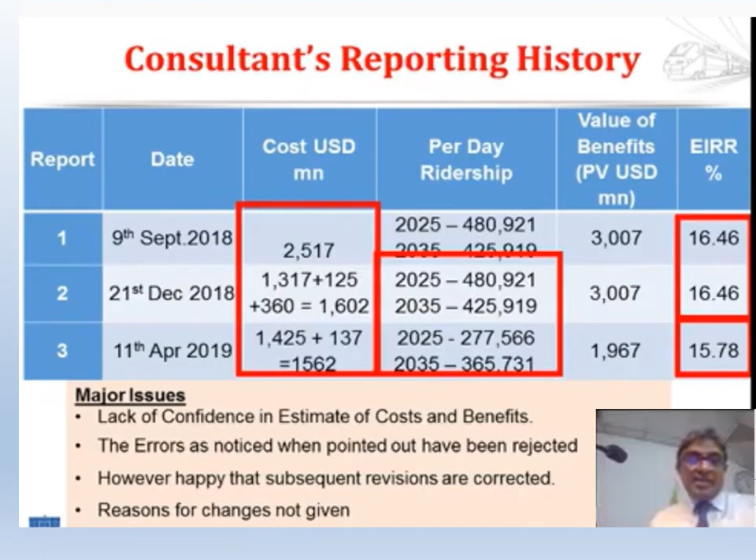The slides extracted from the PowerPoint presented at the seminar summarize the concerns by the IESL. First, they tried to show that there were 3 feasibility reports which kept changing each time a question is asked. The speaker's intention was to show misconduct by the consultants.

However, most of you who have been part of any projects or any study would know that the final report doesn't just come out at once. I have explained before the reasons for the 3 versions of the report and how it unfolded. These draft versions of the reports are usually produced in well-spaced time intervals, giving enough time for project units and stakeholders to give their comments and to monitor the progress of the consultants.

First of all, there's only one official version of the feasibility report approved by the ADB, PMU and the Ministry, and that is the report submitted on the 11th of April 2019. Any of the other versions of the draft reports were only available to steering committee members, and reasons for any changes between the internal documents have been provided to the steering committee members.

It is unfortunate we are not speaking about the final report findings, but on the reasons for the numbers being changed in an internal document, thereby making people confused. This is the very reason internal documents are not shared with the public.

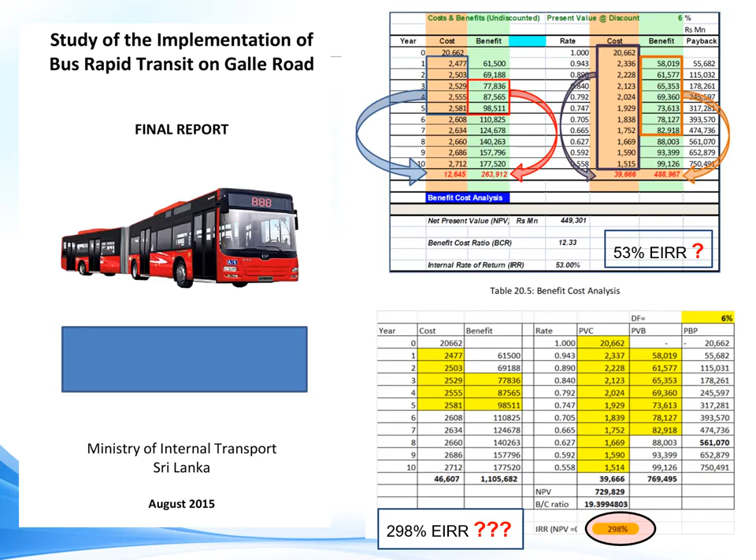It was disclosed that the estimated cost was 2.5 billion USD. As explained before, when ADB and PMU raised the question on cost being too high, the team leader explained that the cost was estimated based on international rates and he expects it to come down by 30 to 40% with detailed designs completed, and will be adjusted in the final report.

He said it on the 9th of September 2018, on the day the first draft report was submitted, not suddenly after a month or because of the IESL question as misinterpreted by the presenter. The cost was updated in the December 2018 report first, and finally in the final report on April 11, 2019. The estimated final cost was 1.4 billion US dollars, with a construction cost of 1.2 billion US dollars.

The reasons for the reduction explained by the team leader were twofold. A, it was due to refining of the initial cost done based on international rates and using new local rates in detailed cost estimation, with optimization of structures like bridges, stations and track works, and due to change in rolling stock cost. And B, due to the previous cost being estimated in LKR and converted based on an exchange rate of 150 instead of 179.

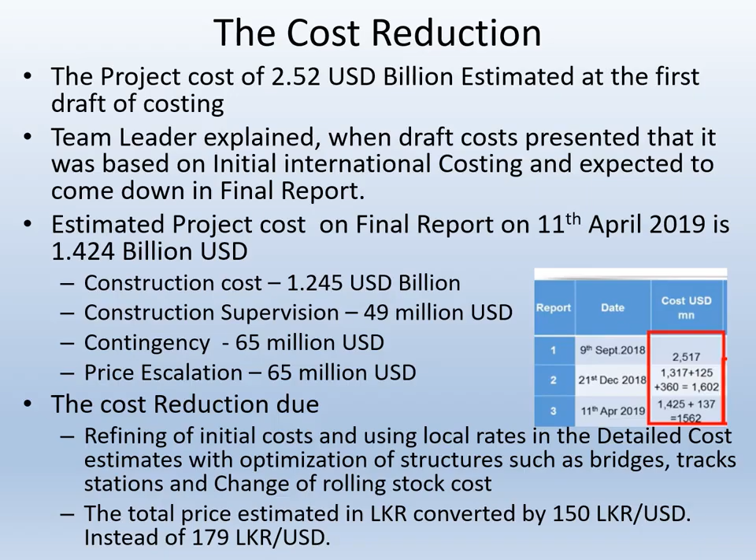So let's move on to the questions on demand analysis. The presenter tries to show that the demand numbers have changed with no reasons given, and tries to add to the story as if the numbers are just made up. The basis for this accusation is that the demand numbers remain high in the so-called reports 1 and 2, and suddenly come down in report 3.

When we do the demand modeling, we don't do one run. It goes through a thorough scientific process, and this is a technique that not many in Sri Lanka understand. So I will explain it in detail a bit later.

Although we know what would happen now, what we don't know for sure is the future scenario. There can be many ifs and buts, and the demand numbers can change based on many combinations of assumptions you make. One such assumption is how you consider population growth for the future. A high growth will have more demand, and a medium growth in population will have lower demand. Later on, you would see that this change in demand numbers was based on such assumptions on population growth.

However, all these model scenarios are well documented in the feasibility report, and therefore there are only two reasons the presenter says what he says: either he has not read the report, or he has not understood what is written in the report, or he does not understand modeling in general.

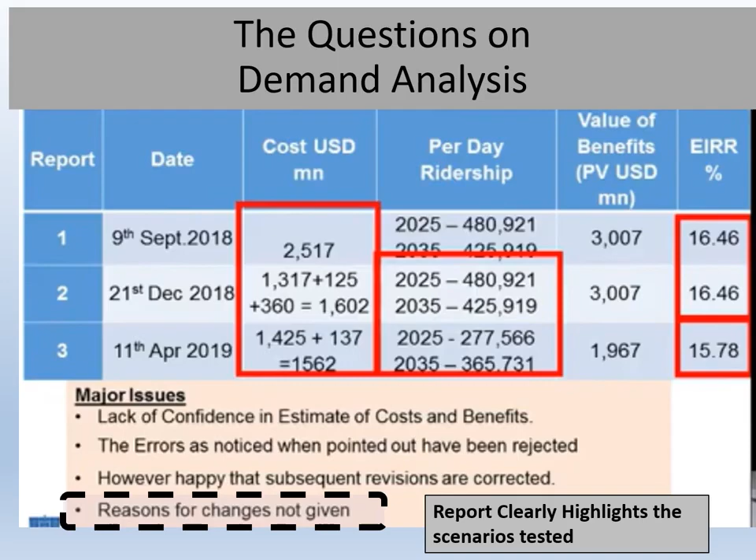The demand modeling designed for the rail demand depends on three key assumptions. The first is the operational assumption that includes the fare, the frequency, the speed, access time to train, wait time, the facilities, etc., which can be considered fixed normally. The second assumption is how you consider the socio-economic assumption, where you consider how your population and employment is expected to grow - that is, whether you consider a low, medium or high growth scenario.

The final and third assumption is what other projects will have an impact on the demand. The impact can be sometimes positive and sometimes negative. While the operational assumptions can be considered fixed, multiple combinations of socio-economic growth and other projects will create the alternatives that you consider for your modeling.

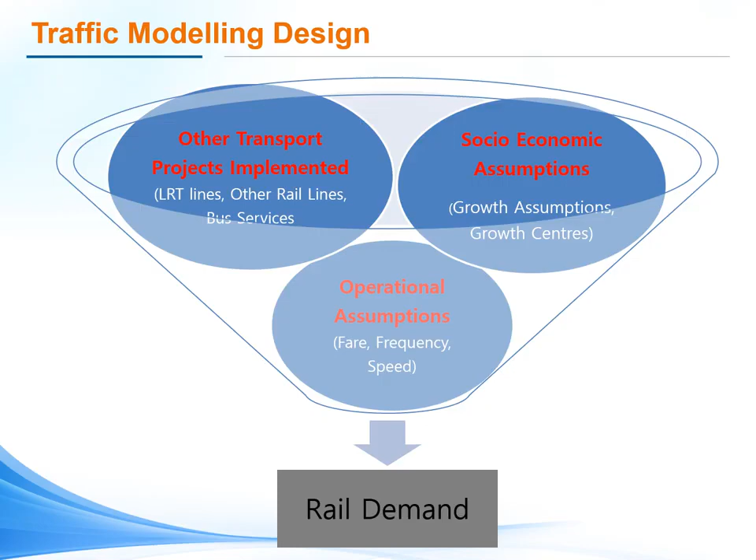There were two major development plans available during the study. The first was the Megapolis plan, which considered a high population growth scenario, with population growing from 5.8 million in 2013 to 9.1 million by 2035.

The second major development plan was the Comprehensive plan, which assumed a medium growth scenario, from 5.8 million in 2013 to 7.8 million by 2035. The study used both assumptions, considering Megapolis as the high growth scenario and the Comprehensive plan as the medium growth scenario.

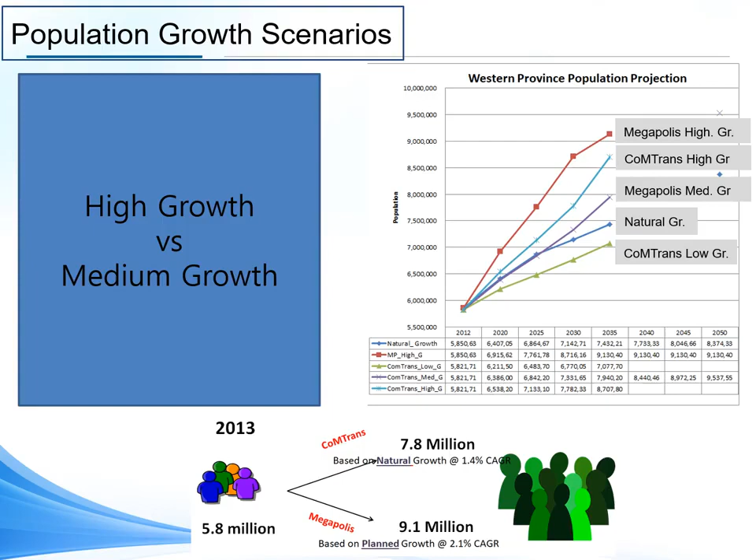These were the socioeconomic assumptions used in the study. Three alternate modeling scenarios were considered. Scenario 1 was a high population growth scenario but with moderate planned other public transport.

This was considered the high growth Megapolis development scenario. Scenario 2 was still high population growth but with virtually no other public transport development, known as the high growth, less public transport development scenario.

The final scenario considered was a medium population growth scenario with the same public transport development as scenario 1. Although only 3 scenarios were reported in the final report, over 50 modeling scenarios were considered in the study to look at the impacts.

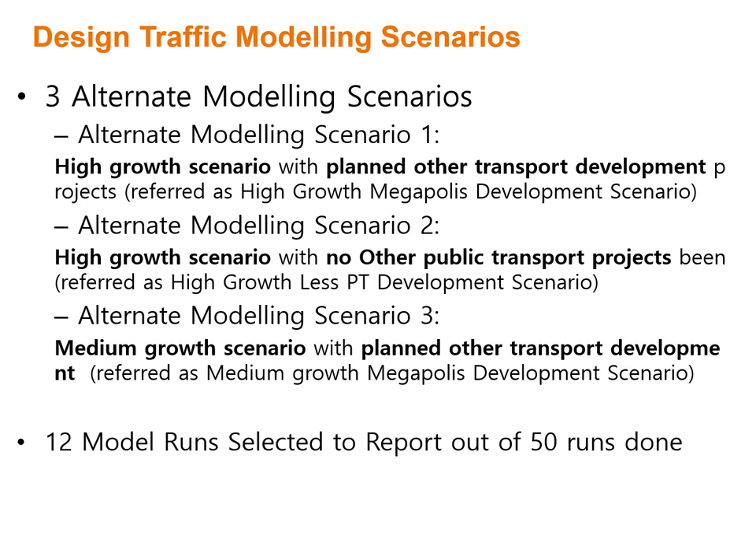The above modeling scenarios were tested using a modeling process I will describe next. What we really want to understand is the number of people or passengers that will use a rail network or a road network. The process used was called a 4-step method.

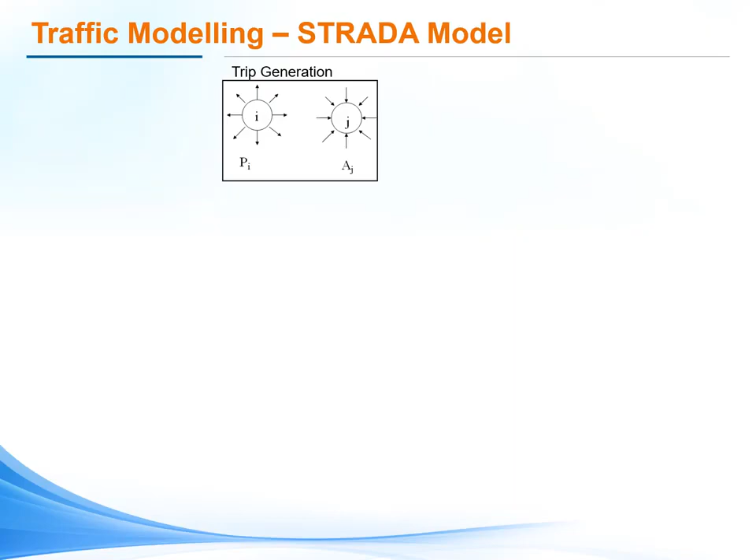The first step is called trip generation, where we determine how many people will travel to and from a particular area. What we get is called a trip table. The inputs are socio-economic information such as population, jobs, school children, etc.

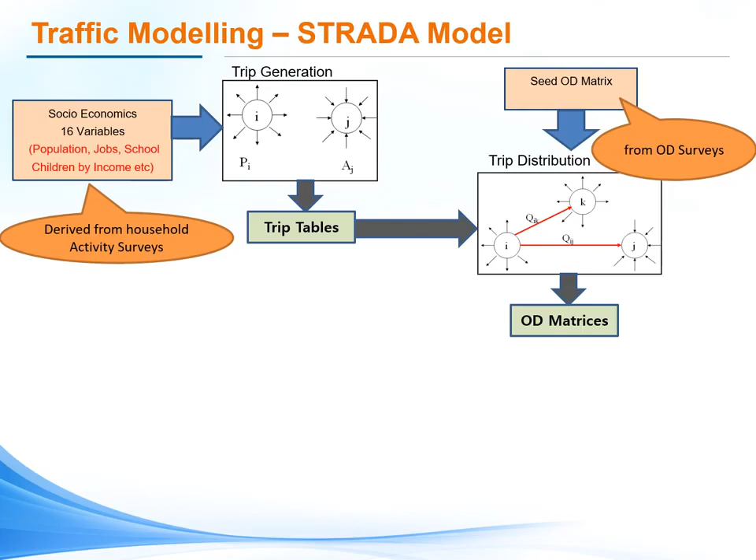The second step is called trip distribution. Here we use the trip tables from the first step and determine where people are going to and from each area. We use previously done origin-destination surveys, and the output is called an origin-destination matrix.

The third step is called mode choice. Here we calculate how many people would choose a particular travel mode to go to their destination from their origin, whether they use the car, motorcycle, bus, rail or LRT.

This is where comparative analysis is done, where fare, travel time, access time, and frequency between each mode play a role, and people choose a mode based on their perception. We use survey information on how people behave to break out one single OD into multiple ODs. This mode choice step is one of the most important steps of urban transport modeling, especially for a public transport study.

The final step is called assignment, where people choose what route they will use. For road networks, we use highway assignment, and people choose which road or route to use. For public transport, we use transit assignment, and people choose between routes in a particular mode.

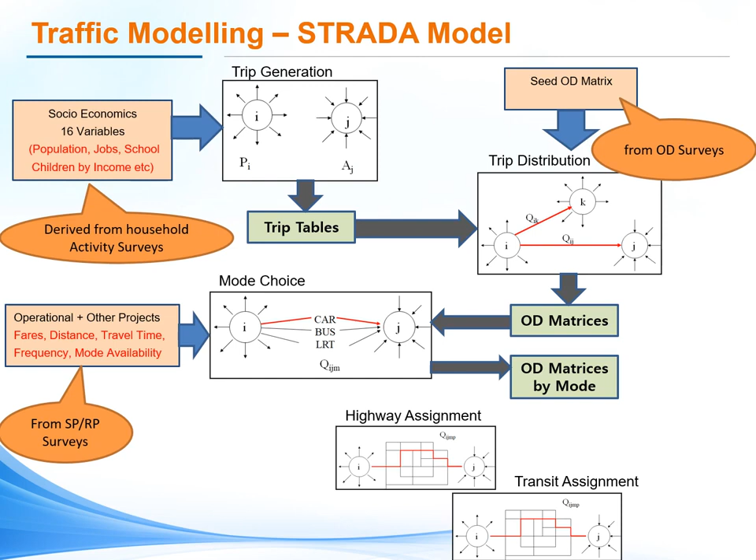For example, if it's a bus, they'll consider route A against route B. The output gives us how many private vehicles will use a road and how many passengers will use public transport. This step is circulated through mode choice in a couple of iterations.

For a known year, when we have information, we run the model and calibrate it so that what we know is produced by the model. That is what we call calibration. Then we run the scenarios for the future to understand what we don't know.

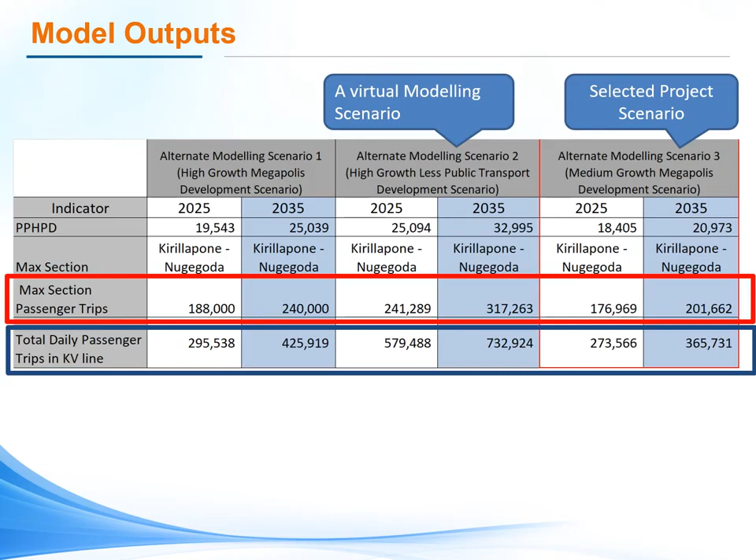The table shows the summary of passenger demand for the 3 alternatives considered, including total passenger trips at the maximum section and total passenger demand in the system. At the initial stage, we considered the high growth scenario and reported that as the project scenario, because Megapolis was the government plan and therefore had a higher expected demand.

But later, based on discussions with the ADB and the PMU, we decided it was more appropriate to use the medium growth scenario rather than the high growth scenario. That is the reason for the change in the demand numbers, and why the demand numbers have gone down.

For example, what was reported as 188,000 in 2025 at the maximum passenger section had gone down to 177,000. What was reported as 240,000 in 2035 had gone down to 202,000.

Similarly, total passengers in the whole KV line network went down. For 2035, it went from 426,000 passengers total to 366,000 passengers. This explanation has been given to the presenter and to the whole group, many times.

So why the reasons keep needing to be repeated over and over again is a big question to me.

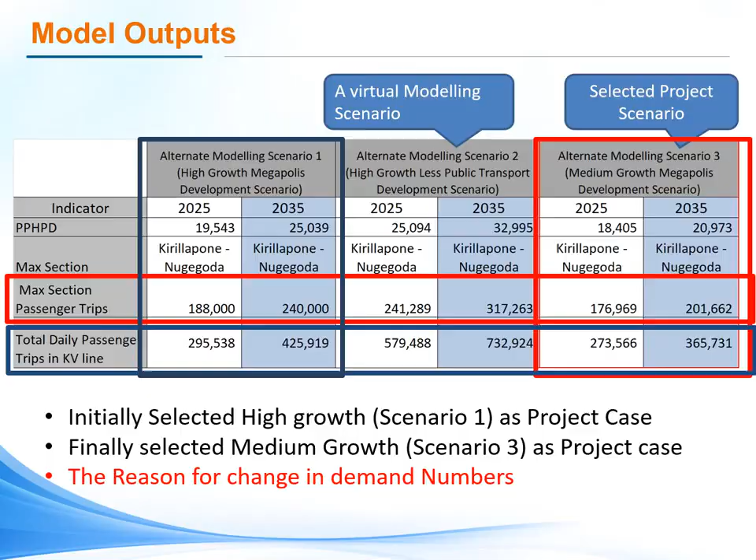There are two separate demand numbers which people sometimes get confused with. One is called the sectional volume and the other is called the total daily passenger trips. The sectional volume is the total number of passenger trips in a particular section. Usually we are interested in the section that has the maximum number of passengers, which is used for planning purposes.

In this case, in the KV line, the section with the maximum number of passengers was the Kirillapone-Nugegoda section. This number is used to calculate the passengers per hour per direction, technically called PPHPD. This determines how many passengers we need to carry during peak time, which in turn decides how many trains per hour we need to send. Therefore, this is an important number.

However, this section does not include all the passengers in the system. For example, passengers having an origin and destination between Fort and Borella, Fort and Narahenpita, Borella and Kirillapone, and Homagama and Nugegoda, etc., do not get counted in this section or the maximum section between Kirillapone and Nugegoda.

Therefore, it is important to know that the total daily passenger trips is different from the sectional volumes. The total passenger trip is the aggregation of all passenger trips between all stations, and this will count all passengers even going a short trip. Therefore, the total passenger trip number has to always be higher than the maximum sectional volume.

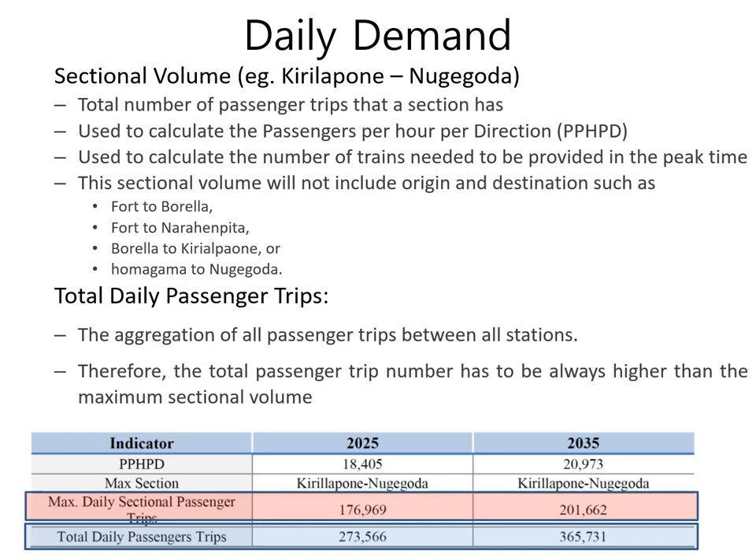For this design, the maximum section value in year 2025 was 177,000 with a PPHPD of 18,400, and for year 2035 it was 201,662 with a PPHPD of 20,973. The total passengers in the KV line system was estimated as 274,000 in year 2025 and 366,000 in year 2035. This is very common for people without modeling knowledge to get confused with this definition and mix up these numbers.

This is understandable as this is the hardest calculation to do manually, going through a 476 by 476 matrix. And if you really don't know what the model is doing, it will be very hard to show it. Knowing the people who do the work for him, and knowing that they don't get any guidance, it is understandable that they have omitted this number.

The presenter tries to mislead people that the same model is being used, going on to say that if two engineers use the same software, the same model and the same input, they should get the same results. You need to understand that the model is a process, and the process is enacted inside the software. Therefore, the model and the software are two clear components.

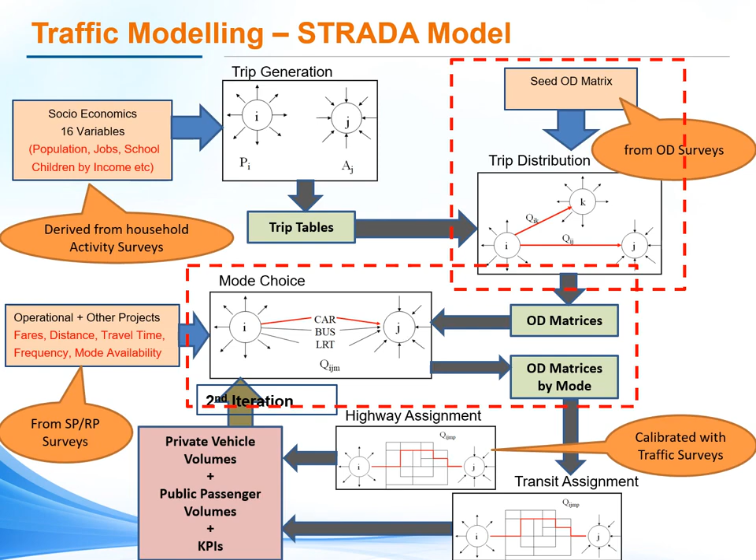You may remember I explained the 4-step model and explained that the mode choice component is the most important step in a public transport modeling work. What I will show you next is how the presenter has considered the approach, based on the documentation of his work.

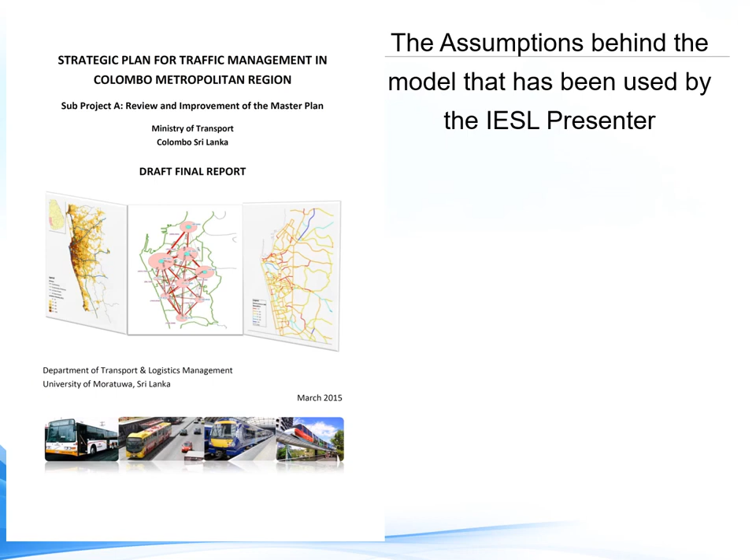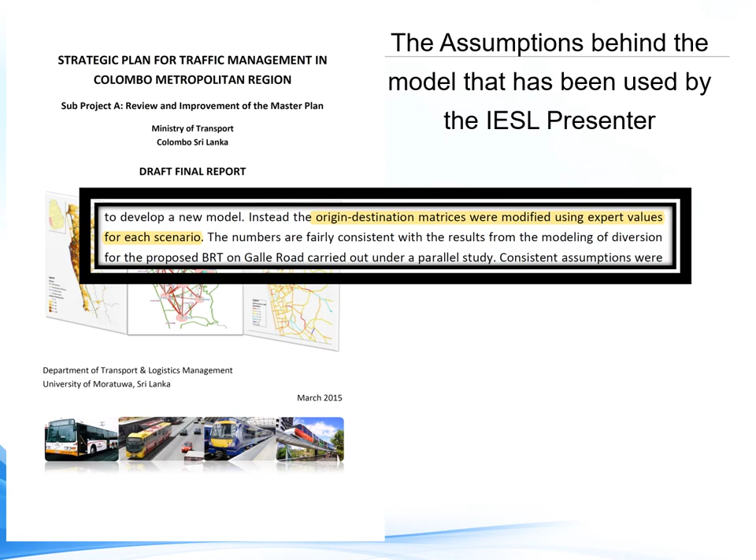You can go through this document where the assumptions in the process he uses are documented. First of all, the OD tables are modified based on expert value, and it is not based on population or employment change. This is one of the hard-coded assumptions that is being made.

Secondly, the mode choice component, which is very important in a public transport study, is omitted, citing that Cube software was not available and due to limited time of the study. Mind you, this study in question took over one year, the study done by this presenter. Also, when we did the mode choice, we didn't need this Cube software, but only needed the knowledge of mode choice modeling, and that is what we used.

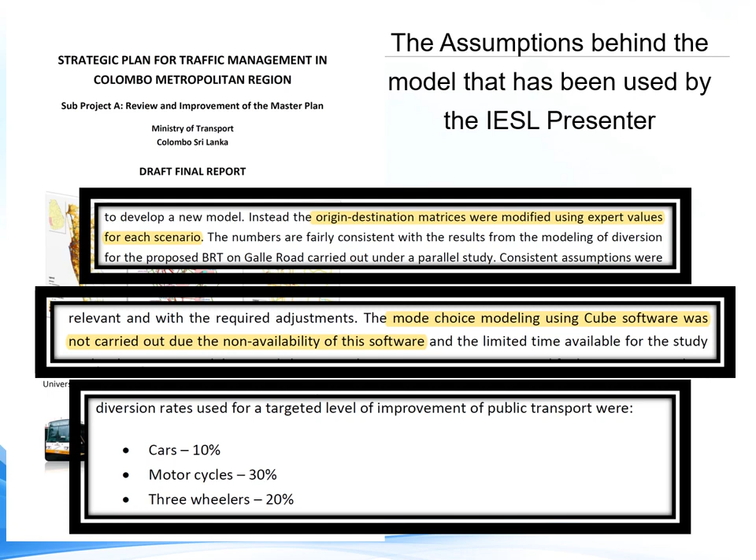Let's look at the assumptions they have used, as opposed to the excuses given earlier for not using proper methods. The assumption used is to hard-code the numbers: when developing public transport like a bus lane, BRT, or railway line, it was assumed that 10% of car users, 30% of motorcyclists, and 20% of three-wheeler passengers will switch to that public transport. This is a very hard-coded assumption that can lead to skewed answers.

In other words, if you want more demand, you can increase this share by a certain number, and if you want a lower number, you can decrease it. These are numbers that are not sensitive to any changes in fare, frequency, travel time, or other projects happening around.

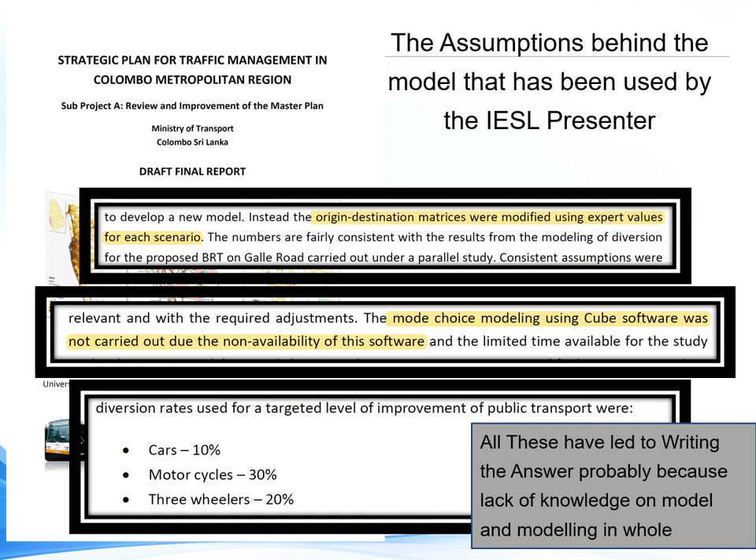So it's clear why we get an EIRR of 298% as discussed before, because these are based on hard-coded assumptions. Bottom line: even if he uses the same inputs, he will never get my results, since we use two different modeling processes. This flawed process was applied in the Transport Master Plan made by the same presenter. Recently he has been promoting this same plan again, citing COVID as an excuse. We should take note of these flaws and have it reviewed by an independent body before considering anything from it.

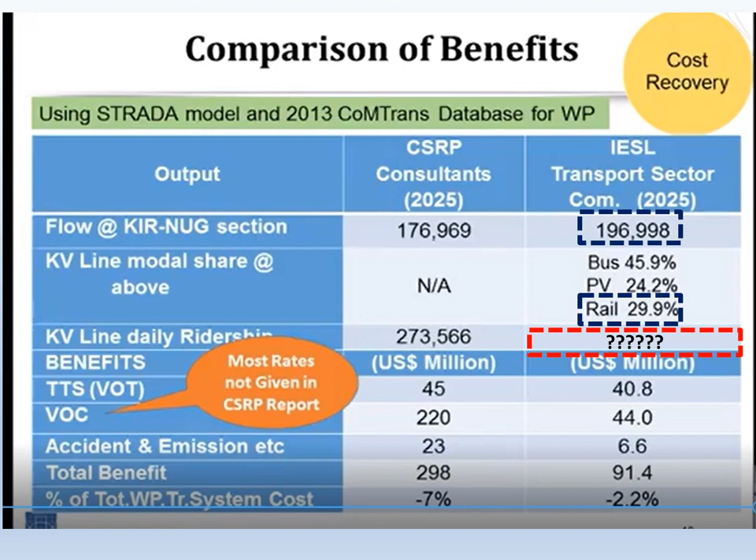Now let's check whether the numbers he presented make any sense. He states he gets 196,998 for the maximum section between Kirulapone and Nugegoda, which is a 30% share of rail from the total corridor, taken from his own slides. If 196,998 is 30% of the total corridor volume, then the total corridor passengers, that is 100%, would be 657,000. I hope you agree with me.

He estimates the total number of passengers passing Kirulapone by car, bus, train, and all other modes will be 657,000 by year 2025, not 2035. The number we surveyed in 2012 was 175,000. So what he's saying implies an 11% growth per annum for all trips.

What we estimated for 2035 in the medium growth scenario was 354,000, and even for high growth it was 419,600. But the same presenter made a big fuss in previous meetings, saying our demand estimations are too high and overestimated. Yet here he estimates a total corridor demand of 657,000 for 2025, which is even higher than our high growth scenario for 2035.

There's something terribly wrong with his estimations. We wanted to check whether we had made a mistake, so we officially wrote to the university requesting his calculations and model, since the model he used was provided by the Ministry of Transport for a previous university project. Unfortunately, he has avoided providing the information, replying that this work was done privately for IESL and not as part of the university. That is again a questionable claim.

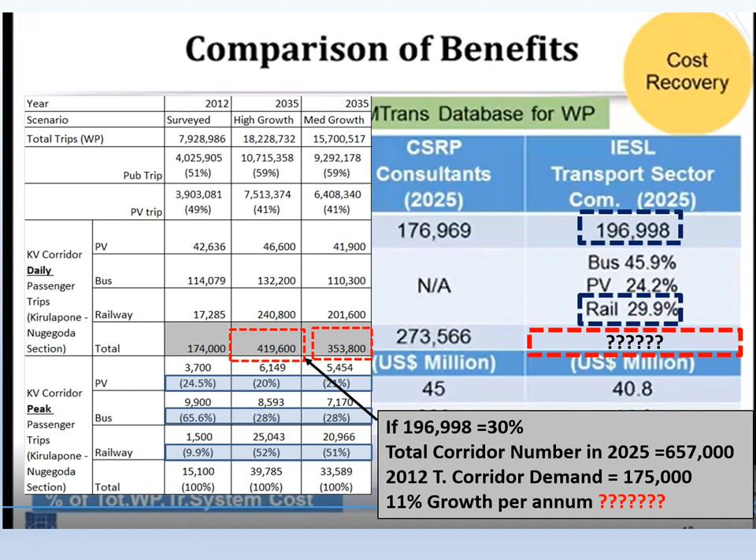Even though the current KV line is carrying 30,000 passengers right now, keep in mind you can't compare the projected numbers against what it's carrying currently, because it's a single track with only 8 trains running in the morning peak and 8 in the evening peak, with only 3 trains in the peak time. This is a substandard system with a substandard signal system, 40 years old, poor quality service and infrastructure. You're comparing this 30,000 demand against a system where we'd expect to run almost 12 trains per hour, and by giving the necessary boost, the model shows that passengers will come in big numbers.

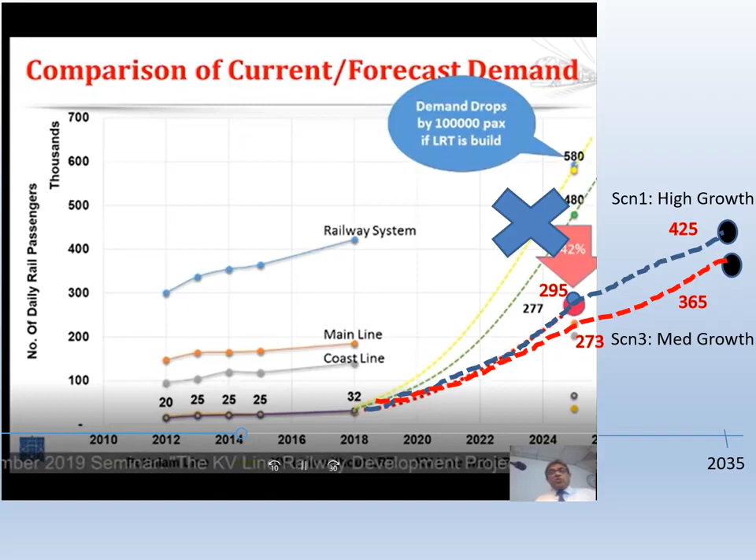Let's move on to the vertical alignment. The argument put forward by the Transport Committee of IESL was that the track should not be elevated from Maradana to Malapalla as proposed by the consultants. Instead, they proposed elevation of 4 sections, basically elevation over 6 roads, to a length of 6 kilometers.

The seminar was when we first saw this proposal. But no details, no calculations, nor the basis for the proposed alternative design is known to this very day. I'm sure if you ask even today, you will not get any answer. However, our team of engineers, mainly local experts with railway engineering knowledge, along with the consultants' team, went on and reviewed the sections they proposed to elevate.

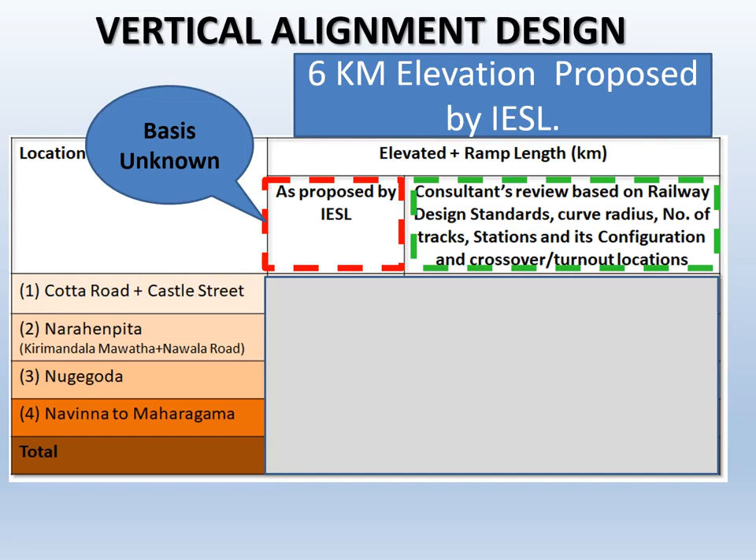The consultant looked in detail at design standards, curve radius, the track, station location, and other factors such as crossovers. The main question when reviewing was to check whether their proposal was technically correct or practical. We expected, coming from a group of chartered engineers, some being railway engineers themselves, that they would have a sound basis for their claims.

To estimate a distance of elevation, you need to know at least 2 parameters: the clear height of the elevated section and the ramp gradient. These are essential. So we asked this whole group at one of our one-to-one meetings at the Finance Ministry for their assumptions. Unfortunately, they had no idea and no answer, not even that it was needed. Their reply was that they had not looked into them in this detail. So later you'll find they had not even considered a clear height, and their ramp gradient was a whopping 3%. We all know you need to provide at least 10 meters clear height at elevation sections, and the gradient cannot be more than 1 to 1.5% for railways.

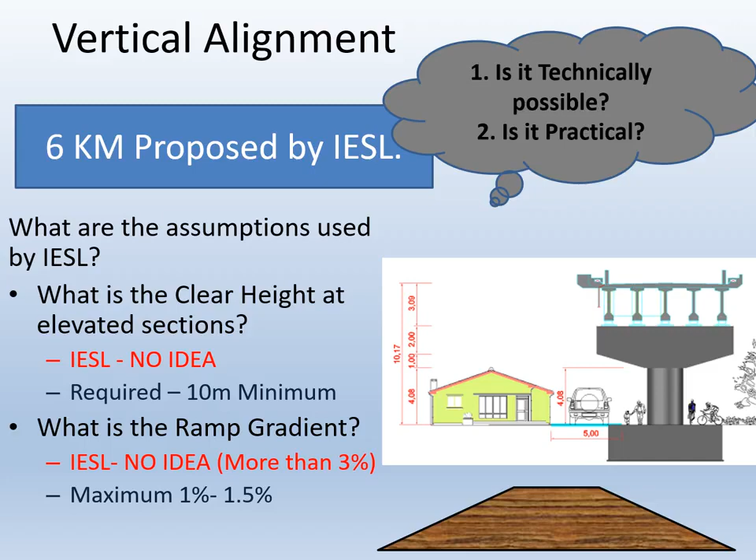Sad, isn't it? I will walk you through why their proposal of a 6 kilometer length is practically impossible and technically incorrect. Let's start with the Cotta Road section, where they propose a 1.15 kilometer elevated section. This elevated section comprises 340 meters of total elevation, a 400 meter up ramp, and a 340 meter down ramp.

First, we found that they had considered elevating only based on clearing the roads. But since the location is close to a station, the elevated section had to be 767 meters instead, to include crossovers and curvatures. Second, we found the ramp length was based on a 3% gradient, which a railway cannot run on. Therefore, the ramp lengths they considered were too short.

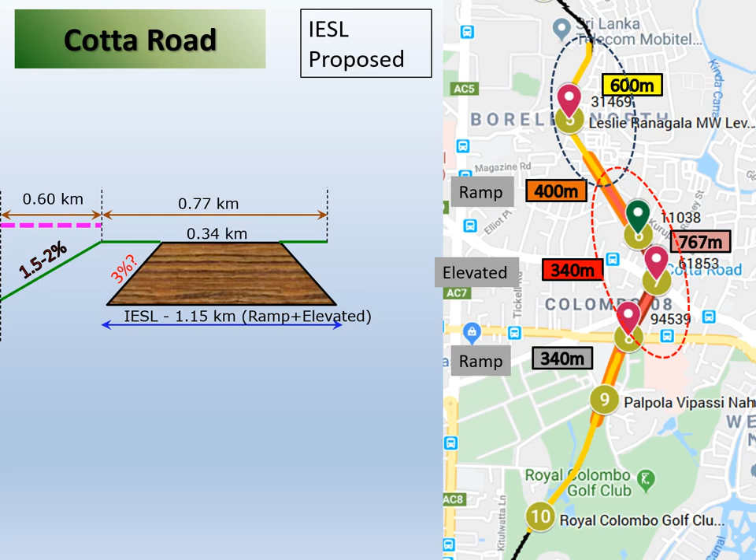The up ramp should be 600 meters instead of 400 meters, and the down ramp should be 780 meters instead of the 340 meters considered. So the assumed 1.15 kilometer elevated length is technically not possible. Instead, a 2.15 kilometer length is needed. And this also created a further problem, because the down ramp came right in the middle of the golf course.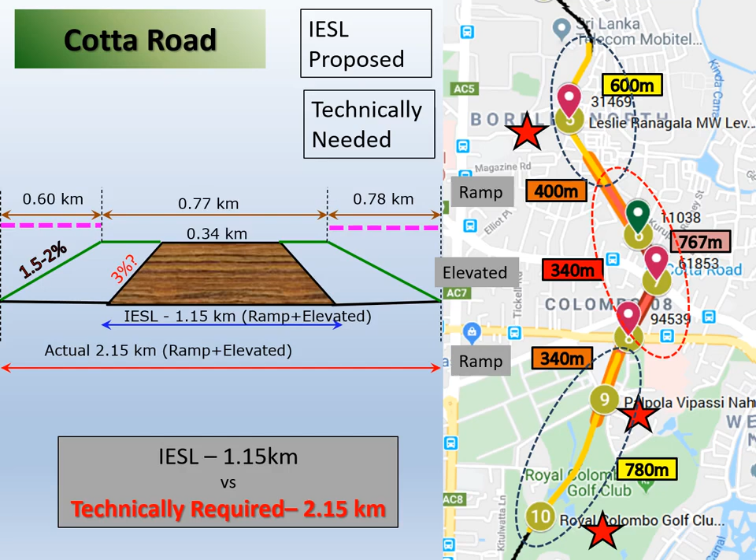Also, two other locations, Leslie Ranagala Mawatha and Palpola Vipassi Mawatha, have to be closed in this case because the ramp section is halfway across these roads, so vehicles cannot pass through at the ramp sections.

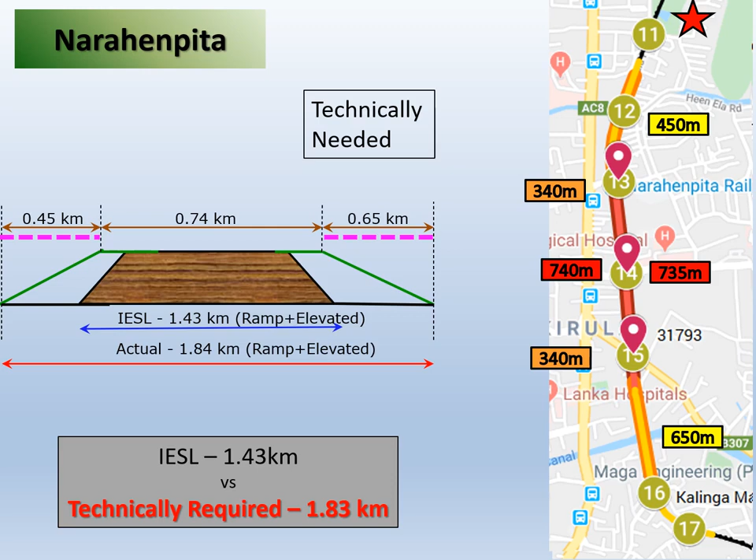At Narahenpita, it's a similar story. They had considered the ramp gradient high, and instead of 1.43 kilometers they assumed, you required 1.83 kilometers to be technically sound. At Nugegoda also, it's a very similar story.

What they had proposed was to use 340 meters as total elevated section, with a 400 meter and a 320 meter ramp length. Once again, there's a station at this section, and being at a curve, the length of elevated section required is 780 meters instead. It also required longer ramp length because they considered only a 3% gradient, and because of the geometry and being at a curved section. So instead of 0.98 kilometers, technically you require 2.69 kilometers.

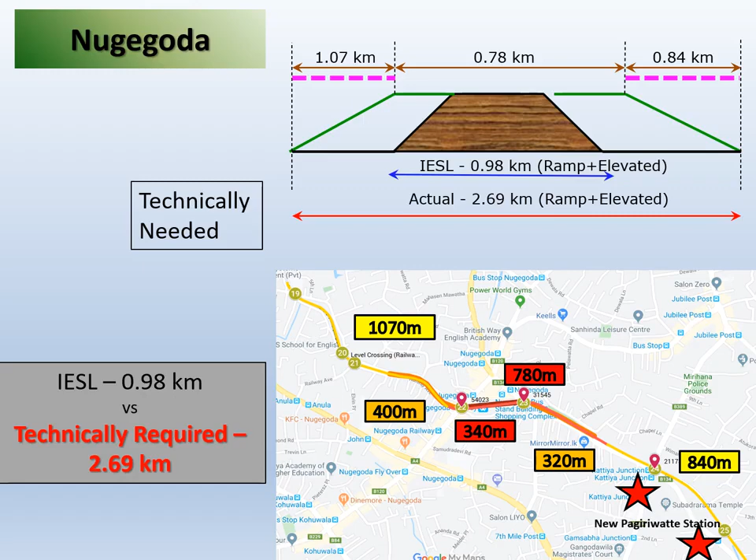It also brought further problems with the down ramp coming right in the middle of Mirihana road, which is one of the widely used roads at the moment.

And the section between Nawinna and Maharagama, they got the elevated length correctly here at 1.6 kilometers, but the ramp section is too short. So instead of the 2.44 kilometers they proposed, technically you require 4.4 kilometers.

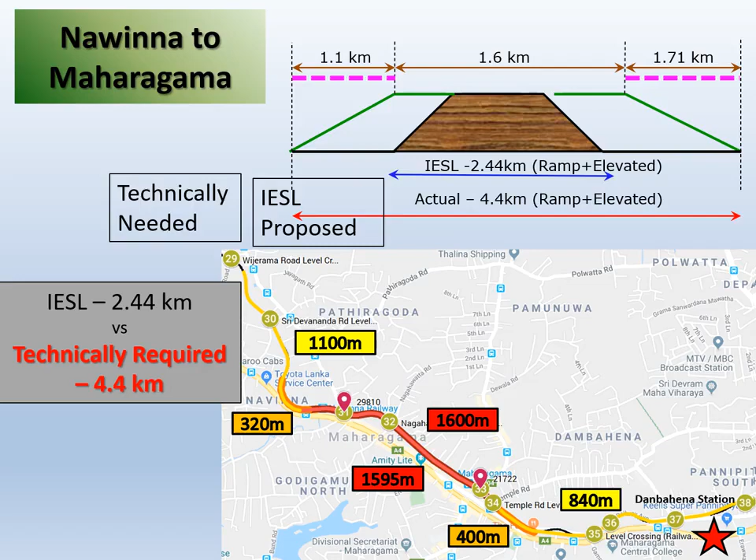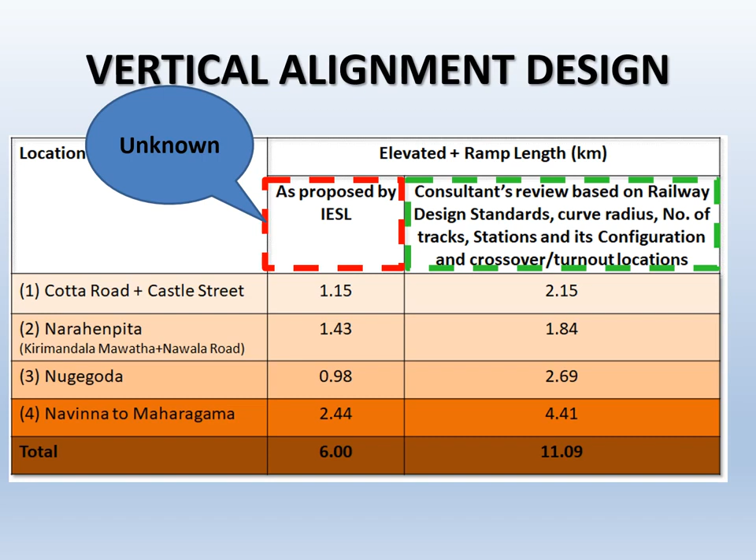So when you summarize what they have told us and our review, we find instead of 6 kilometers proposed to elevate these 4 sections, you will technically require 11 kilometers of elevation. So we can conclude their proposed 6 kilometer track elevation is practically and technically incorrect.

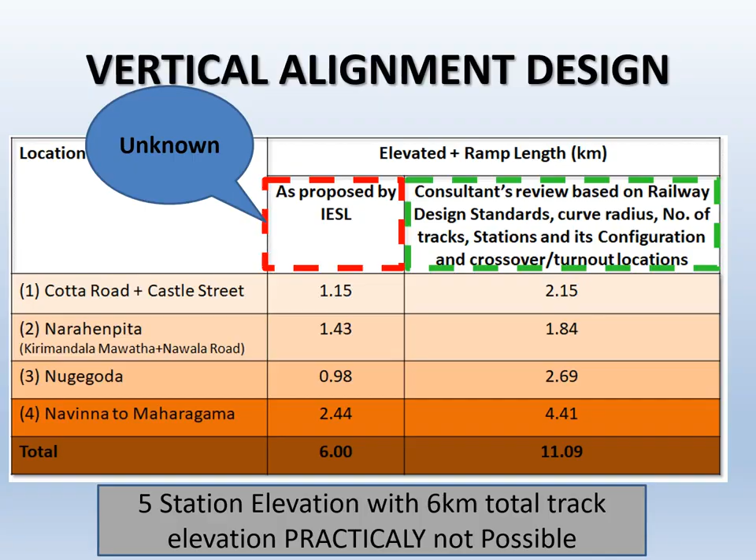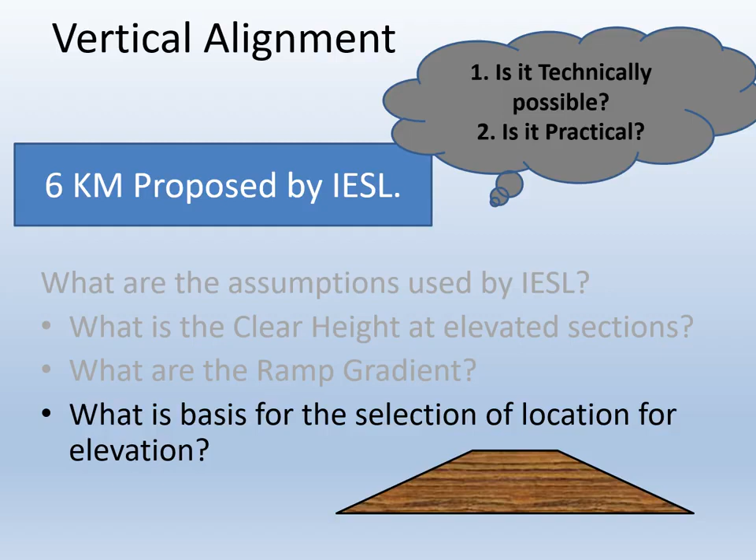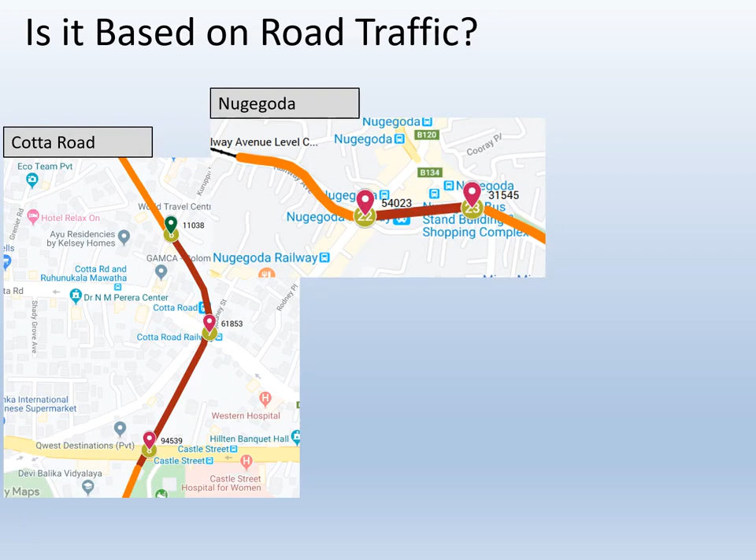We then tried to understand what is the basis for them to propose these 4 sections and why they selected these roads to be grade separated. The question we had was whether the selection was based on road traffic, so we looked at the 4 sections separately and reviewed the ADT, the daily traffic, of all the roads they proposed to grade separate.

We could see that they had recommended to elevate the Ruhunukala road at the Cotta Road section, having 11,000 vehicles per day. And on the Narahenpita section, they recommended to elevate at Dabare Mawatha and Kirimandala Mawatha, having close to 23,000 and 21,000 daily traffic.

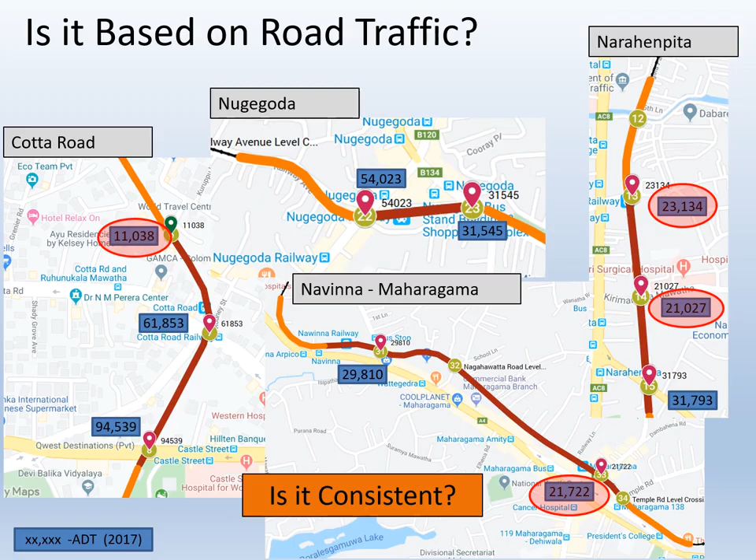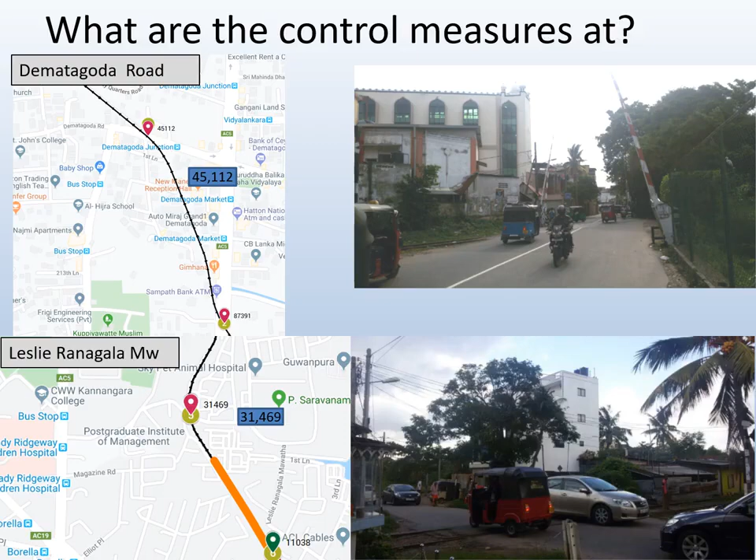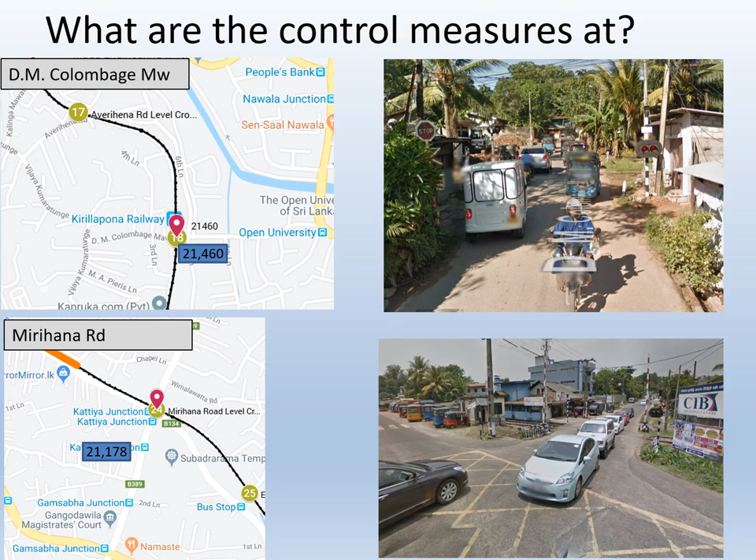But we could not find any consistency, since there were many more roads with higher daily traffic that they did not recommend to elevate. For example, Dematagoda road having more than 45,000 vehicles, Leslie Ranagala Mawatha having 31,500 vehicles, DM Colombage Mawatha having more than 21,000 vehicles, Mirihana road having 21,000 vehicles, Pannipitiya Malabe road having more than 17,500 vehicles, and Kottawa Athurugiriya road having close to 30,000 vehicles, were not suggested to be elevated.

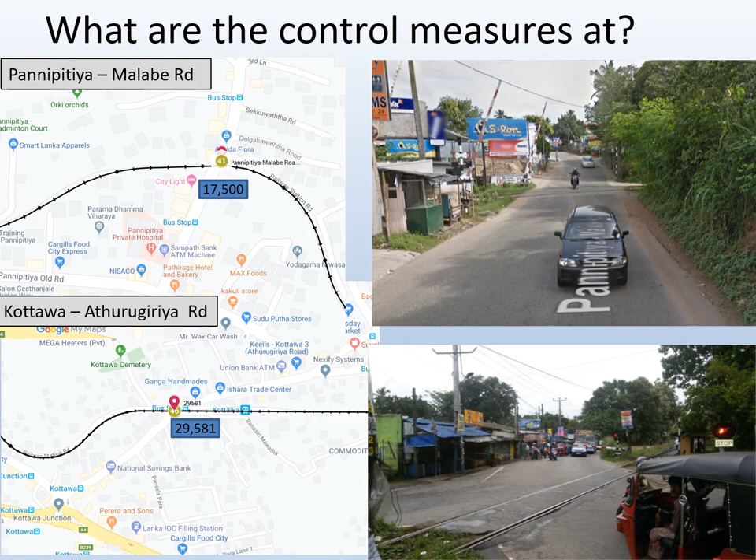So we didn't know what their proposal was. Are they suggesting to control it by gates? The more we tried to find a scientific reason, the more we found that these suggestions were all based on their opinion, not on scientific reasoning.

Now I will explain what we considered when we decided on elevation. First, we considered that there are 148 railway crossings from Maradana to Avissawella, and out of that, 75 crossings were up to Padukka, and there were 56 railway crossings up to Homagama, with 20 major crossings having more than 12,000 vehicles per day, surveyed in 2017.

We also did a scientific approach to evaluate the delays at major road crossings, which will be presented to you later on. We also considered that some roads where the railway crossings are close to the main road, such as Kirimandala Mawatha, Narahenpita, Dabare Mawatha, and Mirihana road, will not allow elevating the road as an option. We also considered the additional benefit of utilizing the space underneath the elevated structure as walking paths, cycling paths, public space, and revenue-generating commercial activities.

We also considered the impact of community separation, because when you have electrification, you will have to fence the whole track. So when going on ground, you will have to fence along the whole total length, and with that, the whole community will be separated. So we have considered that impact.

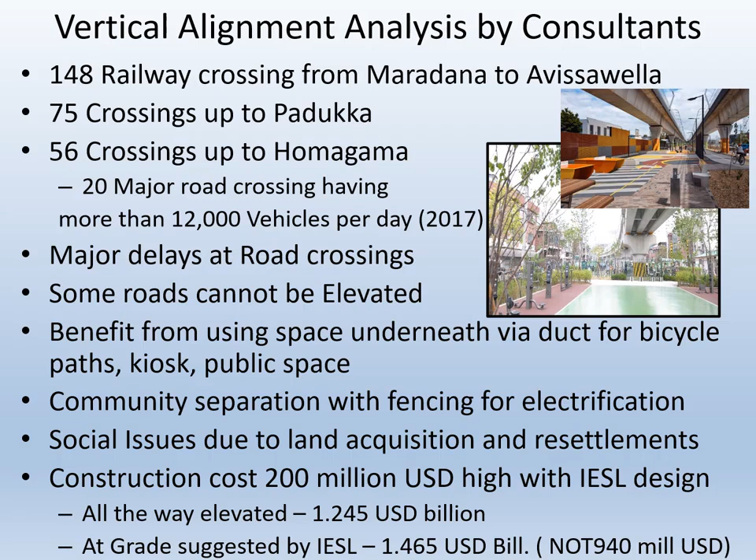Finally, we found that although IESL says their proposal for going at ground with a 6 kilometer elevated section will only cost 940 million US dollars, we found that with a technically correct design and considering safety factors, it will cost 1.4 billion, not 940 million. This is 200 million US dollars more than the construction cost of the elevated option. So their proposal is even higher than going elevated.

There are other issues that will be created by going at grade across a highly urbanized area.

Going at grade will require a higher right of way. Going at grade will be 14.2 meters, while going elevated, the right of way is 12.5 meters. At the moment we have a right of way of 6.5 meters. So this additional 2 meters needed extra due to going at grade will create more problems.

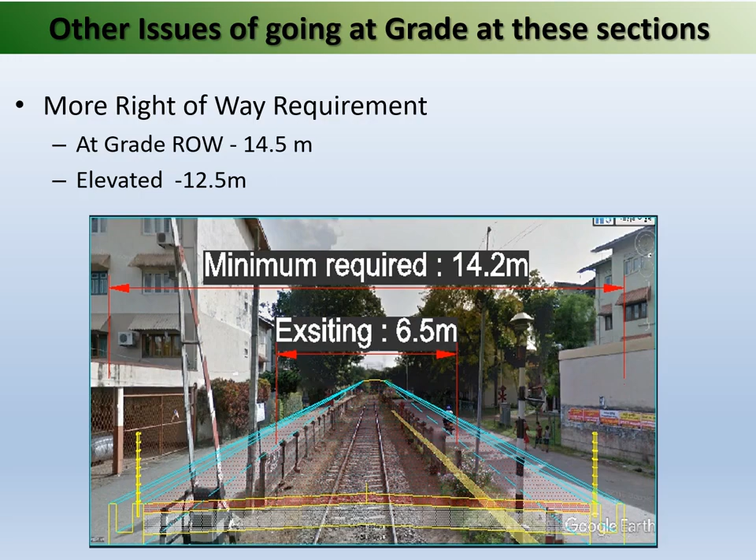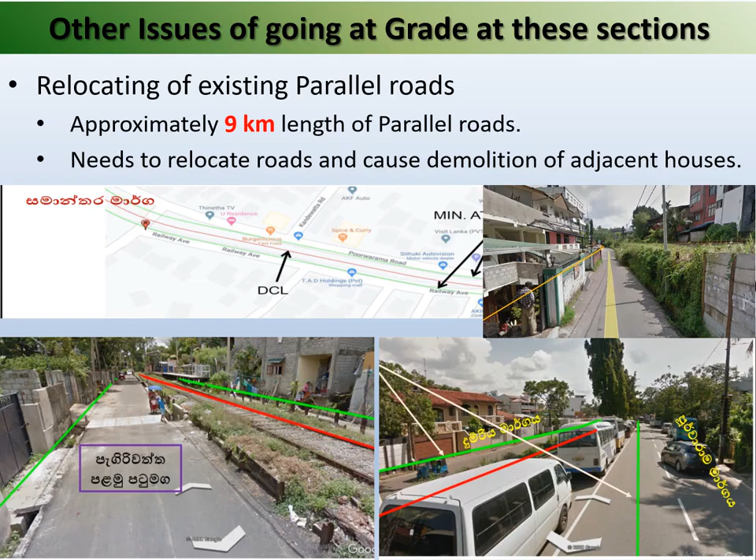One problem is when we go at grade, 9 kilometers of parallel roads such as shown here, Pangiriwatta Road, Poorwarama Road and the famous Railway Avenue will have to be acquired for the right of way. All the houses that have access to their homes through these roads will not have an alternate access, and thus we will have to acquire them and resettle as well. Therefore, 9 kilometers of such roads will have this kind of impact.

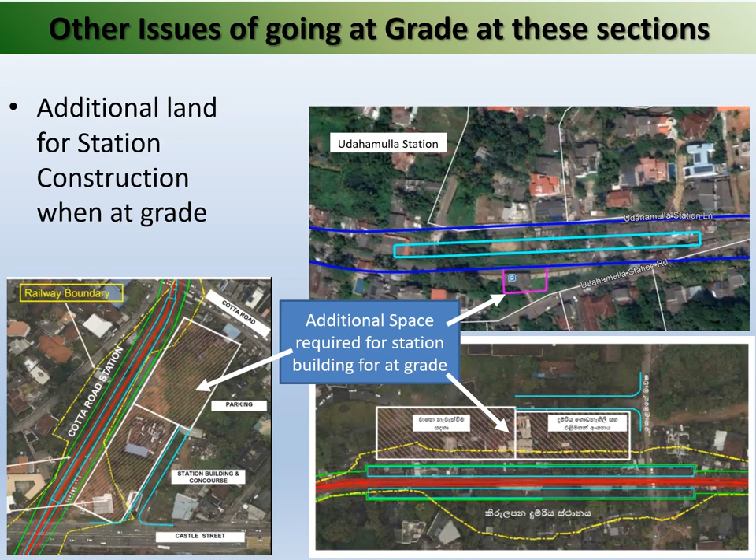Another problem is with the current design. The station is at elevated level above the track, with ground level available for parking, drop-off, and bus touch and go areas. But with the at-grade option, you will need additional space for station and parking, as shown in this picture.

Now getting back to the scientific approach we used to evaluate the impact due to gate closures. We used two methods. One was based on vehicle flow, and the other was based on the UN criteria for train vehicle units. For the vehicle flow method, we used micro-simulation software to simulate what will happen to the road network when a train passes and the gate is closed.

We varied the train frequency and the traffic flow to see the impact. The model was calibrated using information at baseline road, where at present the gate is closed for between 2 to 3 minutes each time a train passes, and that is with a single track. The current queue length at peak time flow rate was about 440 meters, with a per-lane flow rate of 1300 vehicles per lane.

We simulated future gate closures with 2 minutes, considering the gate will have to be closed on average when trains are operating in both directions at high frequency. So what we found was at the current traffic rate, the queue length will be about 625 meters when the trains are operating at 10-minute intervals.

And if we go to a higher frequency of 5 minutes, the queue length will be about 825 meters. And when you consider future traffic flow, this will increase to more than 1 kilometer when trains are operating at 5-minute frequency. Therefore, we found from the simulation that there will be considerable impact on the road network.

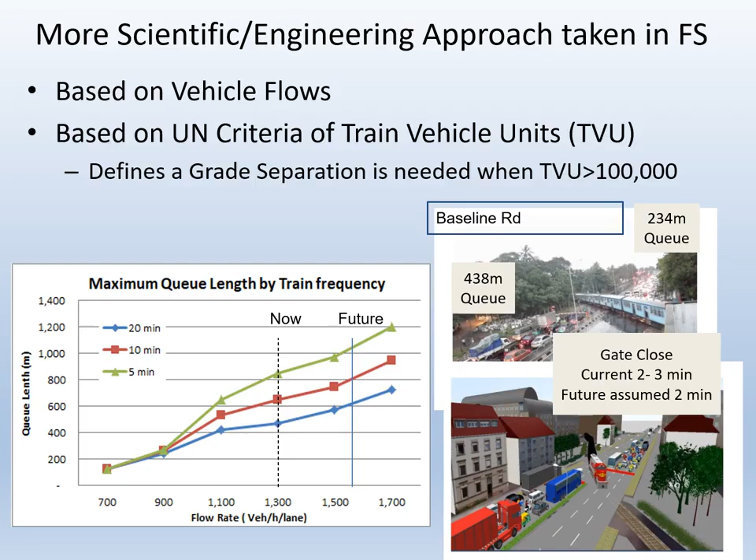Almost all 56 locations up to Homagama were surveyed. We checked each location based on the observed ADT surveyed in 2017 and calculated the peak hour flow, because the peak hour flow is most important when looking at the rail-road conflict. Then we calculated the flow per lane at that peak time.

Based on that, we found each of the locations up to Malapalla will need grade separation. Grade separation means it will need either rail elevation or road elevation. And when you consider that all the locations continuously need elevation, it makes sense to elevate the railway.

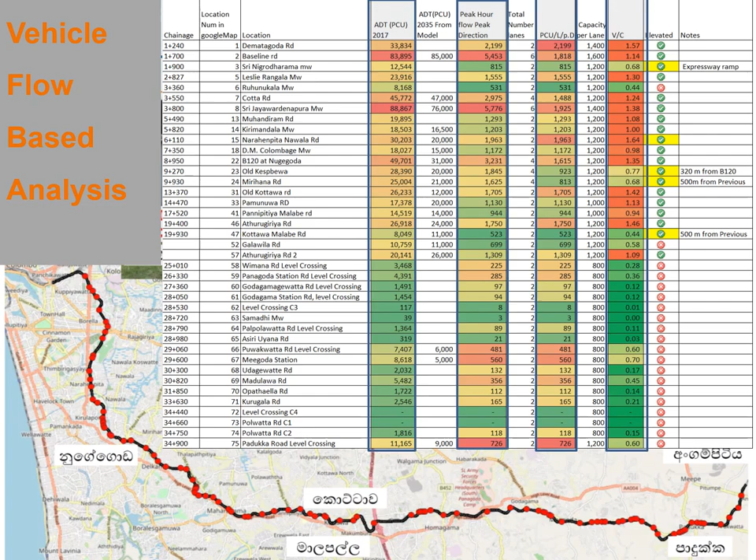The second method was to use the UN criteria of train vehicle units, or TVU, where the criteria was if it is more than 100,000, these locations had to be grade separated. Based on that calculation as well, we found that up to Malapalla, grade separation was required. So you can see that we have used multiple criteria and consistent methods for our recommendation, unlike the ad hoc way proposed by the Transport Committee of the IESL.

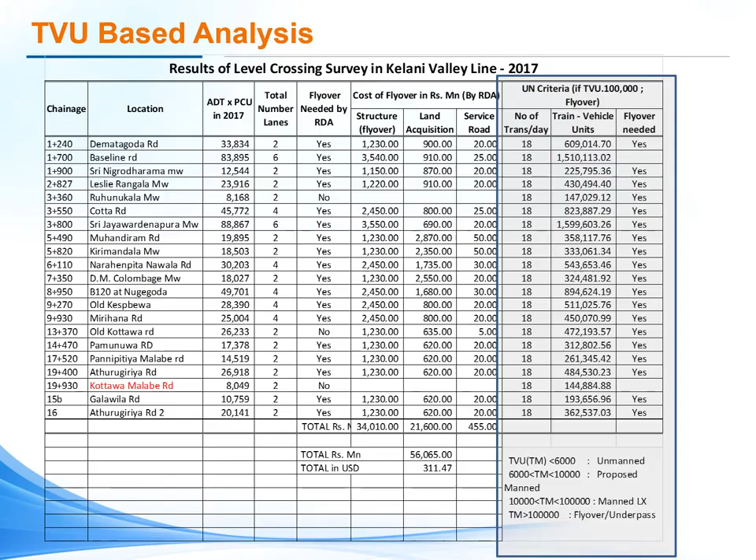Recently, I have heard about concerns raised by the group that elevation will increase the total time of a passenger, since they have to walk 7 meters high and come down 7 meters. And also comments such as the person carrying a coconut or a pole malla will have to climb stairs with elevation. What I want to show is actually at present the passengers would climb 7 meters up and 7 meters down where they want to go across to the platform.

They do it with overhead bridges, and this is very common in railway stations. So this argument, the people who make these arguments maybe don't know that in railway stations you have these kinds of passenger overhead bridges. The model considers the overall access time, wait time, all in its analysis.

The argument from the group gets funnier and funnier each time. According to the argument, no one should build other than single-story houses or work in multi-story buildings, since the time now increases by going downstairs, or going to their offices, which is multi-story. So I really find this very humorous.

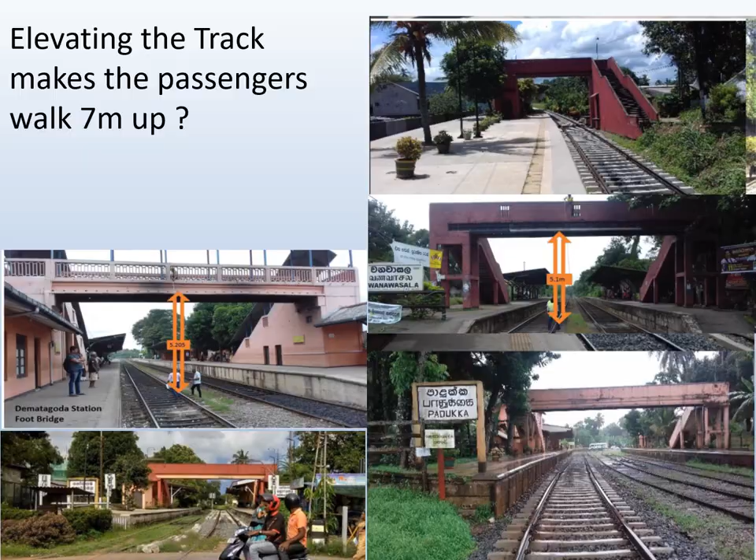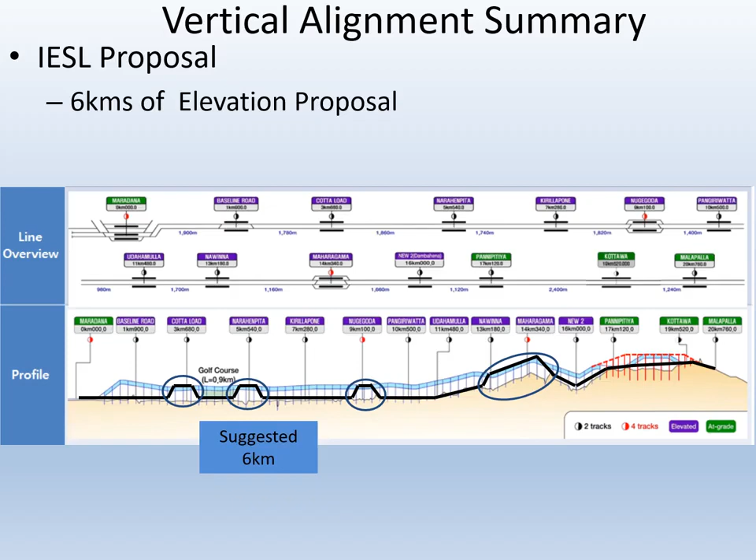To summarize the vertical alignment option, IESL proposed that instead of elevating, only 6 kilometers can be elevated, with the profile as shown below. What we found was that it was technically flawed, with a 3% gradient being considered, that it would have been like a roller coaster railway. We also found that instead of 6 kilometers, it will actually require 11 kilometers more for a technically correct design.

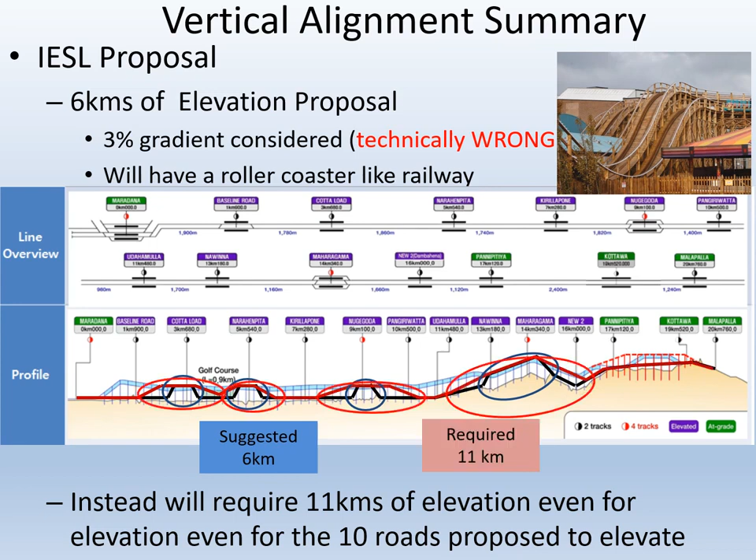But we'll have many more problems created because only 10 road crossings will be addressed. Then we also find that their design would actually cost 200 million US dollars more. And this will also happen, we'll need more acquisition, and it will also separate the community, and also the land underneath will be wasted.

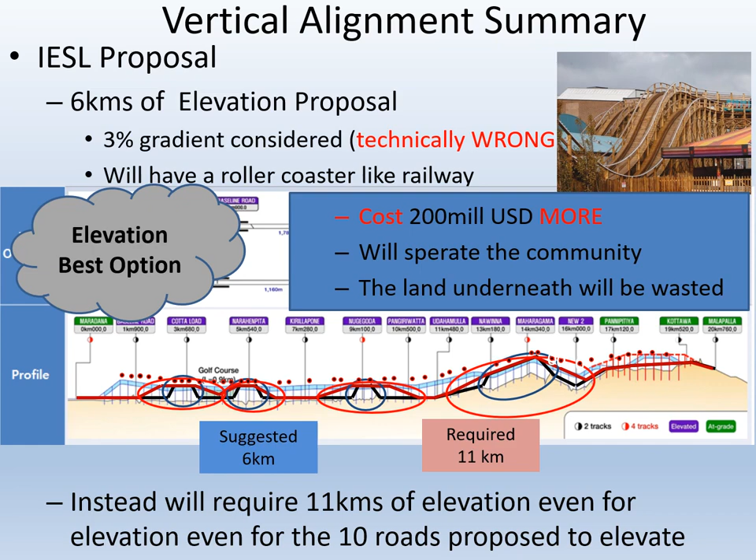And when we consider a more scientific approach, we found that the best technical and feasible option, and the least cost option, would be going elevated. Let's move on to the horizontal alignment.

The presenter, when he spoke about the horizontal alignment, said that the new alignment will not have any curve straightened, and it will be like a serpent running across, and with elevation it will never be able to straighten. What was not shared with you was that in fact the curves are straightened to some extent, which does not need acquisition. And second, he did not mention what would be the advantage or benefit of straightening. I will try to answer those questions.

It is obvious the best case scenario would be if the rail line is as straight as possible. In fact, the best alignment would be if we draw a line between Maradana and Avissawella and start acquiring land, if land acquisition is not a problem. But that is not the case when the alignments are selected. You need to consider multiple criteria such as cost, the speed you will gain, connectivity, acquisition, social impacts, etc.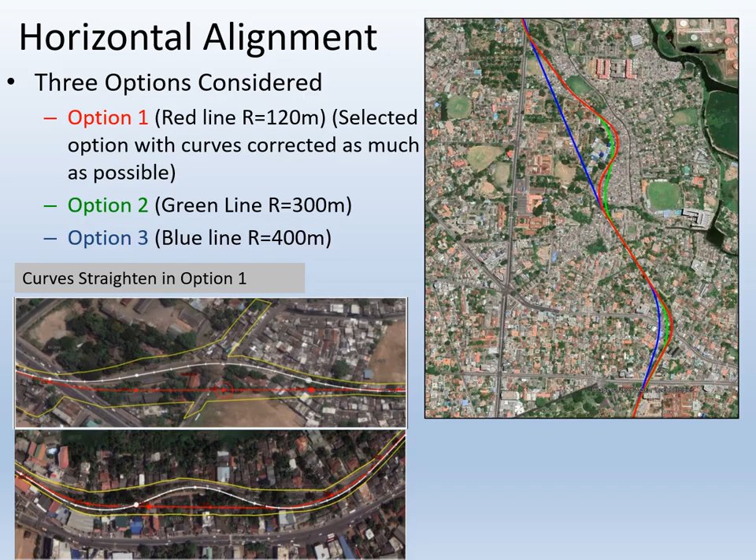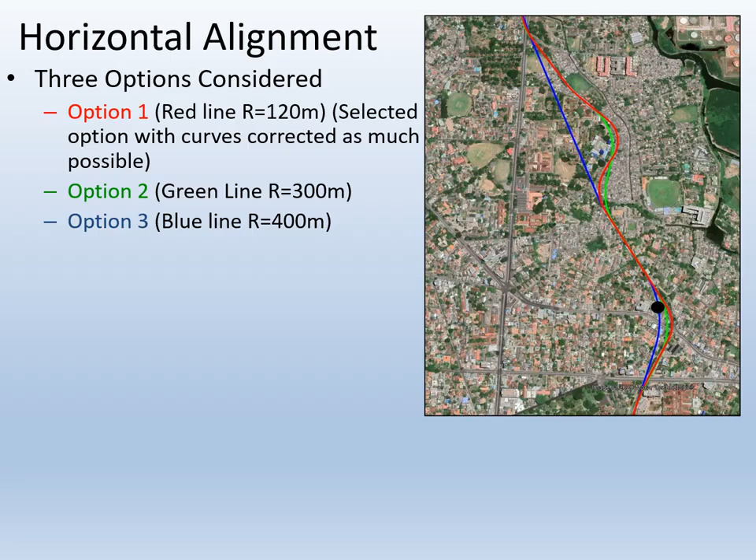Let's look at the second option. Option 2, shown in green color, is with curves corrected up to 300 meters, and option 3, shown in blue color, is with curves corrected up to 400 meters, which is virtually making it as straight a line as possible. As you see, both option 2 and option 3 have major acquisition involved, considering that the line would go through highly urbanized areas. I have heard people saying that it is a matter of acquiring people living in encroached land, but you can see that it is not true, and these statements are made to mislead people.

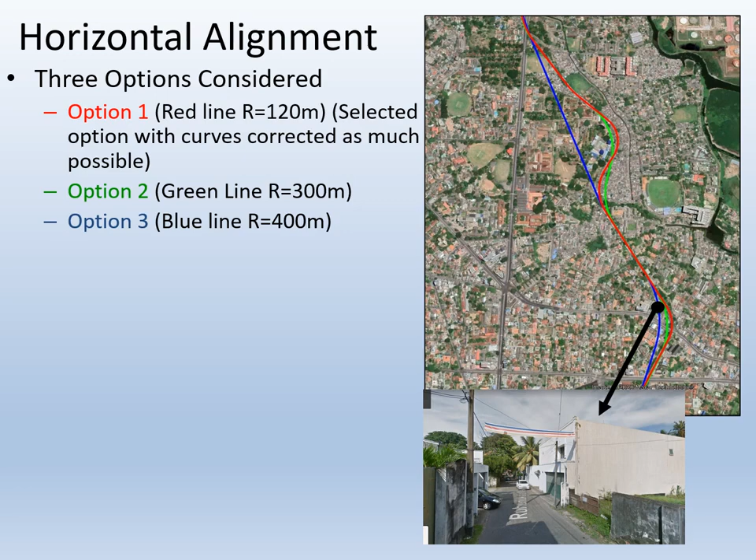If you compare the three options, option 1 can have a maximum speed of about 40 kilometers per hour in sections with 120-meter radius, where option 2 can have a maximum speed of 70 kilometers per hour, and option 3 can have a maximum speed of 80 kilometers per hour. But option 1 will require about 29,000 square meters of acquisition with a cost around 8.5 million US dollars.

Option 2, on the other hand, will require 110,000 square meters of acquisition with a cost about 32 million US dollars, and option 3 will need about 172,000 square meters of acquisition with a total estimated cost of around 50 million US dollars.

And mind you, this cost is only for land acquisition and will have extra costs for resettlement and other costs.

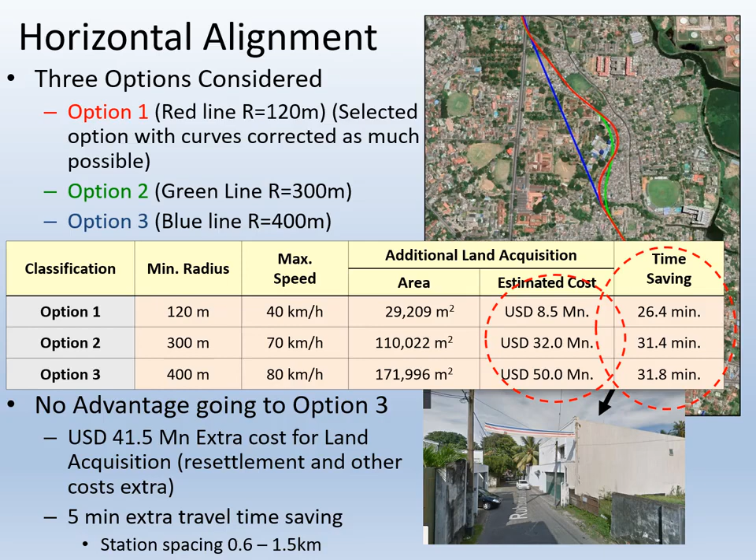So when you compare the options, there's no advantage in going to option 3 that straightens the curves by spending over 41 million US dollars more, because you don't get any benefit of the increased speed. Option 1 gets a time saving of about 26.4 minutes compared to now, while straightening only gets a time saving of 31.8 minutes. So virtually a 5-minute extra saving by straightening the curves by spending over 41 million US dollars, with many inconveniences to the public plus maybe lengthy legal battles.

But you would wonder why there is no speed increase with the straightening. The reason is the first section has stations very close to each other, between 0.6 to 1.5 kilometers, which does not allow a train to achieve maximum speed possible, even with the straightening. That is because before you can accelerate to the maximum speed, you need to decelerate again to stop at the next station.

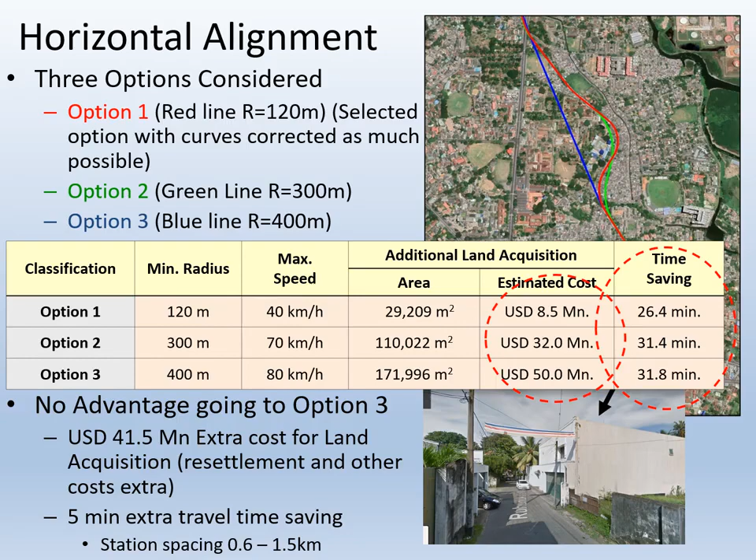There were mentions about freight movement as well, that by elevating we will not be able to transport freight. First, we need to see whether there is demand now or in the future for freight on this line. What we found from studies is that there is no such demand. In fact, only 2% of total freight is handled by railway at the moment, and 98% of that transport by rail is cement inputs and oil products.

Up to Homagama, there is no demand for container movements, and even if there were, short-haul container movement through rail is not economical anyway. Further, if a need arises, the current design allows container movement along the elevated section, so there should be no restriction to carry parcels delivered at the moment. There is no need to elevate the containers up to the elevated structure; if required, facilities can be provided to access the container yards if necessary. Further, long-haul freight movement to Avissawella is planned through a new line proposed through Kelani, Kosgama and Avissawella.

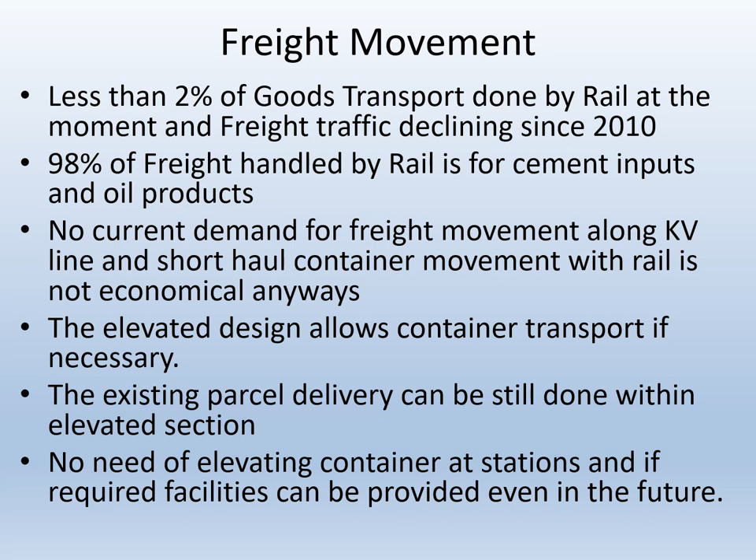In conclusion, I have explained to you the misinterpretation behind the story of multiple feasibility reports, and would like to confirm that there's only one final feasibility report, submitted in April 2019. I have also explained how the presenter misinterpreted and misinformed you about the project cost, and how he misinterpreted the demand numbers, explaining to you the reasons the numbers have changed based on alternate scenarios.

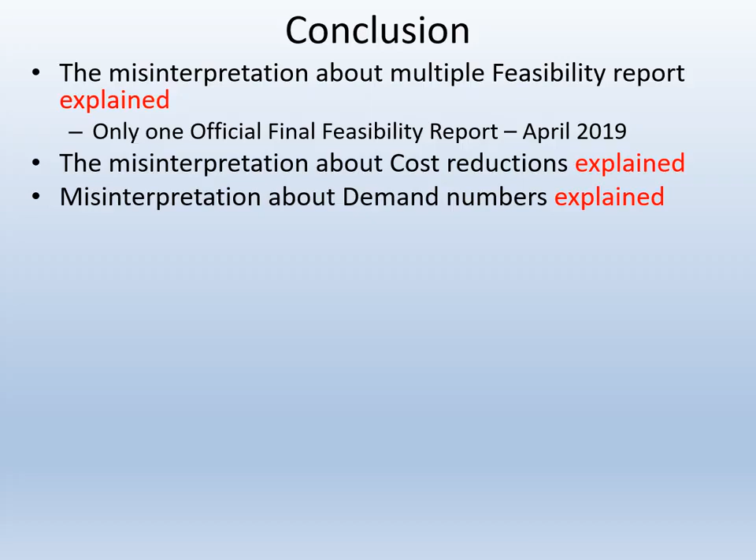And I have shown the inconsistency in the past work of the presenter who is accusing us regarding the demand. I also explained what the consultants have considered for the vertical alignment and the decision on elevation of the track, while highlighting the technical flaws of the alternative proposed by IESL, and that their proposal would cost $200 million extra. I have also explained the options considered for horizontal alignment, and the reasons for selecting the current proposed alignment.

Unfortunately, what I have explained to you has been explained to the presenters and the IESL Transport Committee since January 2019, over and over again. My question to you is, if you had listened without prejudice and were able to understand the justification given, why does this group keep repeating the same thing over and over again?

How ethical was it for them to make a confidential document public, disregarding the code of conduct of being on the steering committee? How ethical is it for them to go and write to the ADB? And in the first instance, it was their steering committee member who did not attend the steering committee meetings when these crucial decisions of elevating

that is the vertical alignment or the horizontal alignment and the cost, all these were discussed. Can a group who had objected and tried to sabotage the expressway construction, and even held a workshop the day before the opening of the expressway with similar lobbying, be trusted?